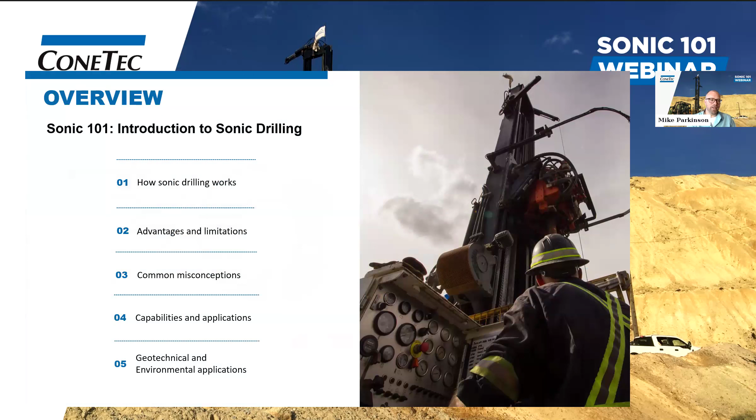Okay, so welcome to Sonic 101, an introduction to sonic drilling. We'll talk a little bit about how sonic works, the advantages and limitations, common misconceptions, and then we'll talk more about capability and geotechnical and environmental applications.

Starting a little bit with our own history, ConeTec was founded back in 1985, and the first CPT we ever pushed was actually deployed from a Mud Bay Drilling rig here in Western Canada. Mud Bay Drilling has been providing drilling services since 1972, so for over 50 years. And we added sonic drilling services back in 2002, so over 20 years ago. We did that in collaboration with ProSonic, and ProSonic was later acquired by Boart Longyear.

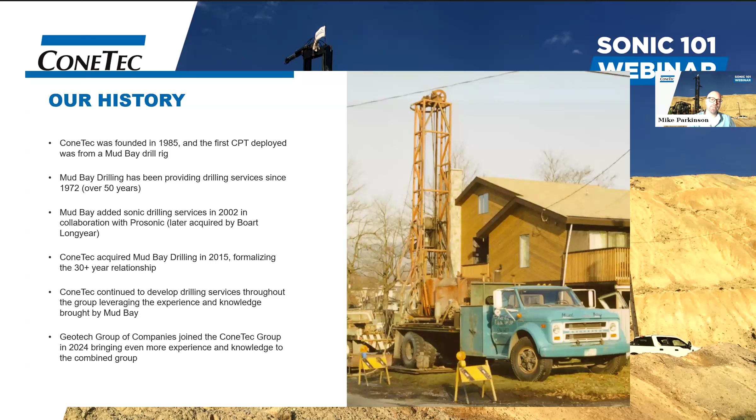So ConeTec acquired Mud Bay Drilling back in 2015, and that was really just formalizing our 30-year relationship at that point in time. Since then, we've continued to develop drilling services throughout the ConeTec offices and around the world, and we've been leveraging the experience and knowledge brought by Mud Bay's 50 years of experience. And then more recently, we added the Geotech group of companies to the ConeTec group at the beginning of this year, actually. And that brought even more experience and knowledge to the combined group.

We got another poll here as well. This one's just, what's your experience with Sonic? And I think Kelly will put that up. Yes. Let me get rid of this one. We'll just give that a second. Maybe while that's happening, I'll start with some Sonic basics here.

So the basics of how sonic drilling works is that it uses high frequency vibrations to advance the drill string and the bit. The vibrations are produced by two counter-rotating weights in the head, or eccentric weights, which is essentially the oscillator. These weights are timed to each other, so the lateral forces are equal and opposite, and they cancel each other out, and the vertical forces are equal and in the same direction. So it only transmits forces vertically down the drill string.

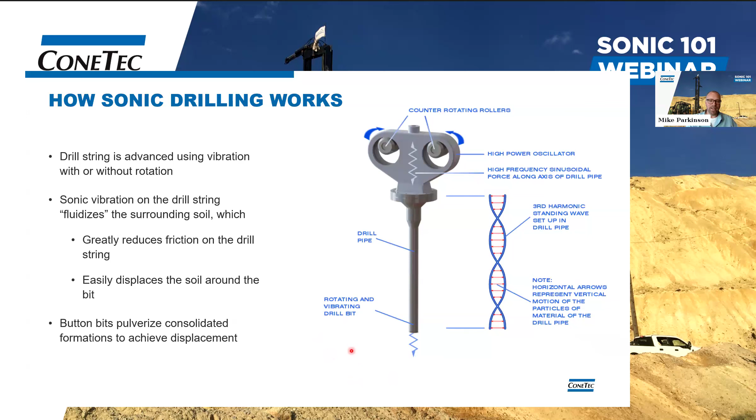And then the drill string is advanced using both vibration and rotation, sometimes without rotation though. The sonic vibration on the drill string fluidizes the surrounding soil, which greatly reduces skin friction on the drill string, the core barrel, and the casing, and then it easily displaces the soil around the bit. There's carbide buttons on the bits and shoes that can pulverize rock or consolidated formations so that you can achieve this displacement with the core barrel or casing.

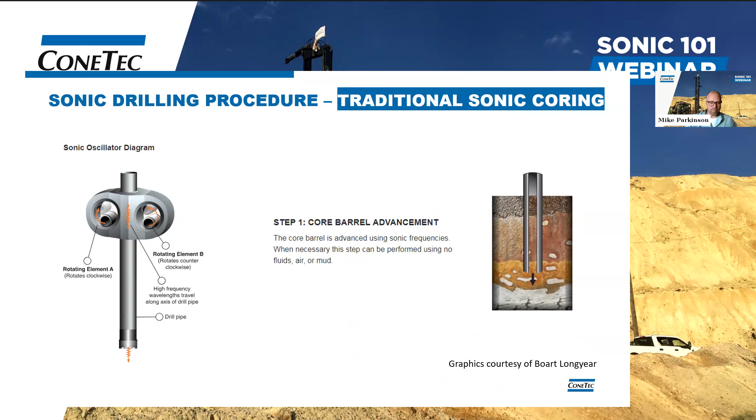So the traditional sonic coring in North America would be 4x6 coring, or that's what we call it. That's a 4-inch core with a 6-inch casing. And that's what I'll refer to as traditional sonic coring from now on. So the first step is that the barrel is advanced into the formation using both rotation and vibration. You're not using any fluids or water at this time. Once you've advanced the barrel, you can stop and disconnect from that. And the core or the sample is inside the barrel at this time.

The next step would be to connect to your casing or your override casing, and you'll actually override that casing over top of the core barrel, which is already in the formation, again, using vibration and rotation. And at this time, you'd use some water or flushing media to keep the annulus clear between the casing and the core barrel, but the core itself is protected inside the core barrel and not subjected to whatever flushing media you're using. Once you've met the same depth as the core barrel with the casing, then you'll disconnect from the casing, reconnect to the core barrel, and pull the core to surface and extrude it.

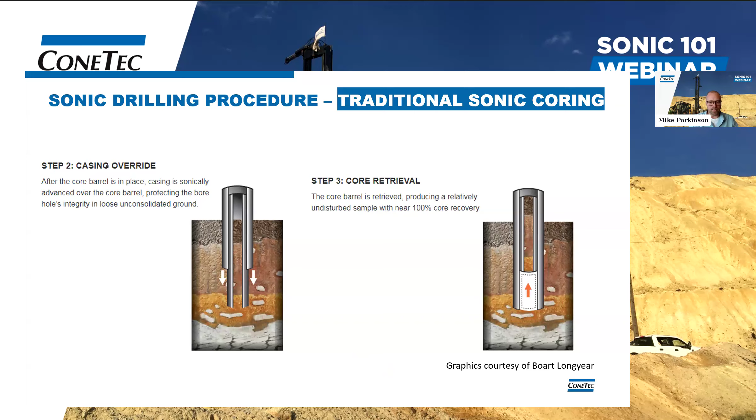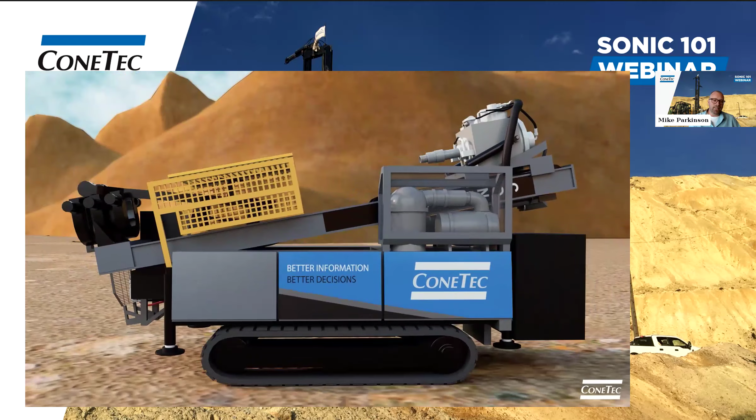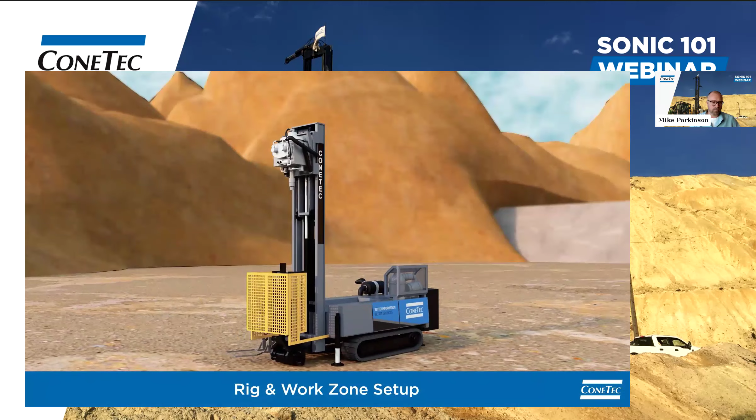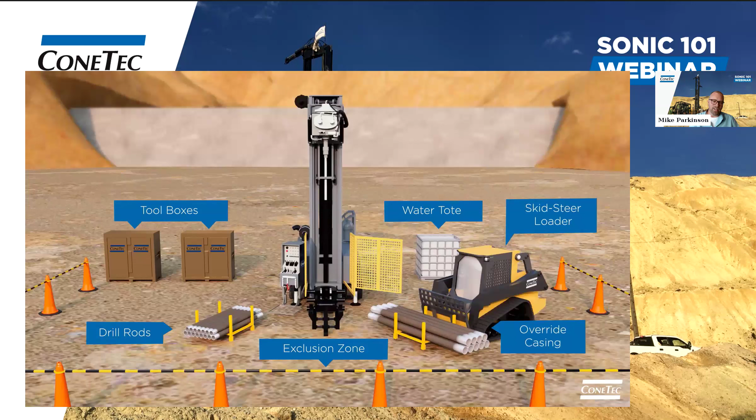We have a nice animation here that'll run. So this animation depicts one of our compact sonic drills, so smaller, shorter stroke drill rig, but still 150 hertz and 50K. The yellow door there is the rotation guard, and then that's the casing presenter or rod presenter. Usually have casing racks and rod racks on site and some kind of support equipment like a skid steer or small loader.

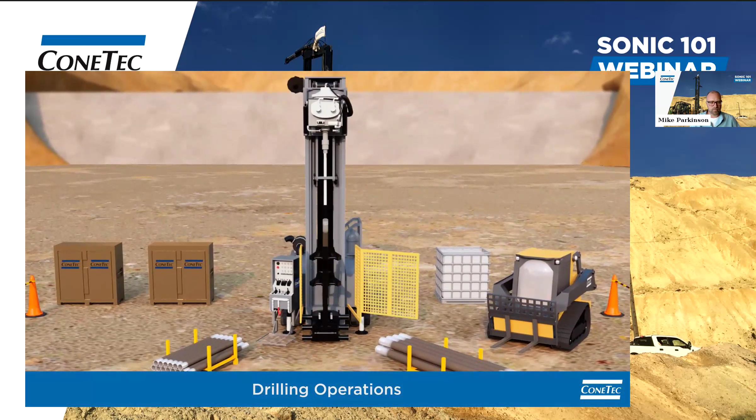So then this is the core barrel being advanced into the formation, again, rotating and vibrating. You can see the core goes inside the barrel. And then the casing's overridden over top of that. And the barrel's retracted back to surface and the sample extruded.

Right. Did we get the results of that poll, Kelly? People's experience with Sonic? Yep, I did. I posted it for a little bit. Let's see if I can share results. Yeah, so the experience is about 50-50 as to completely new to Sonic or a little experience. There's just a few frequent specialists on here. Great. Okay. Great to know. Thank you.

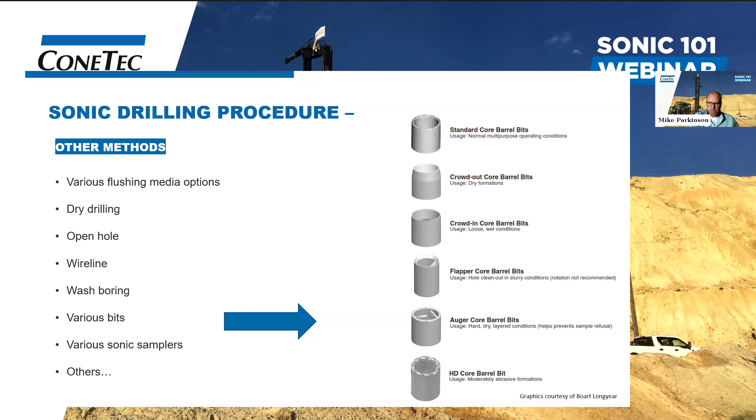And then there's a ton of different bits that you can use to help maximize sample recovery or just increase production rates. And then there's various sonic samplers. One that we're pretty familiar with is an Aqualock sampler from Eijkelkamp. It doesn't actually require any casing, and it's very, very good at collecting sample in very soft soils. And there's just a lot of other options as well beyond the traditional sonic coring.

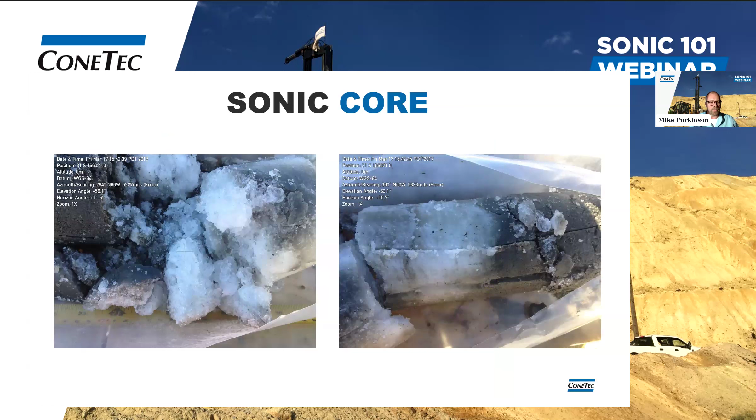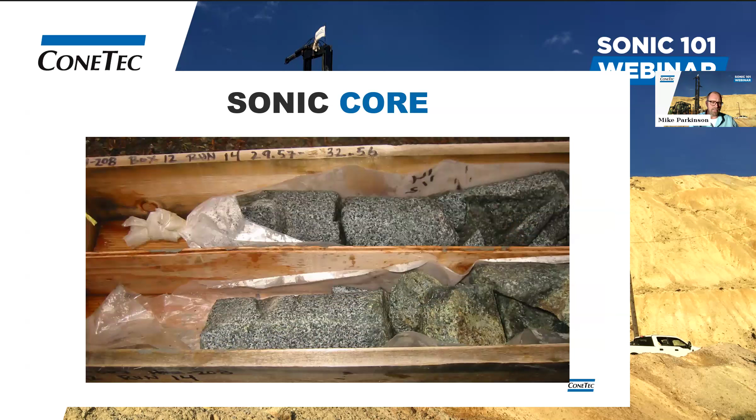And then this is actually a really interesting example. This was a mini sonic rig installing some wells. They encountered a granite boulder pretty close to surface, actually. Managed to drill through it and install the well. And when they were pulling the casing back out, the boulder actually got caught on the casing shoe and came out of the hole. So you can actually see the well installed in that hole below there. And then it gave us the opportunity to take this very cool picture of the granite boulder with the casing shoe, the core barrel bit, and the core that they took out of that granite boulder.

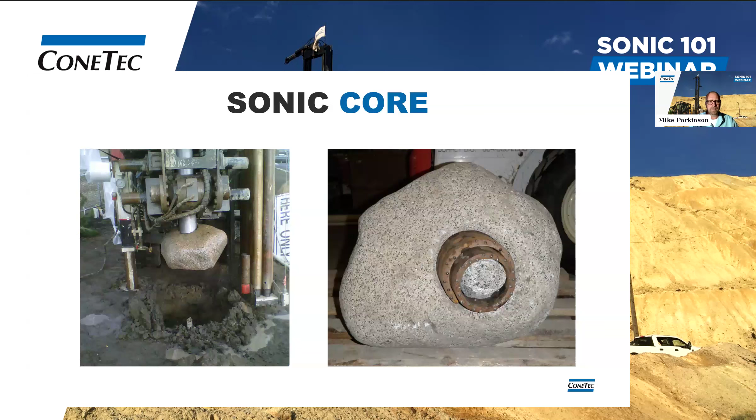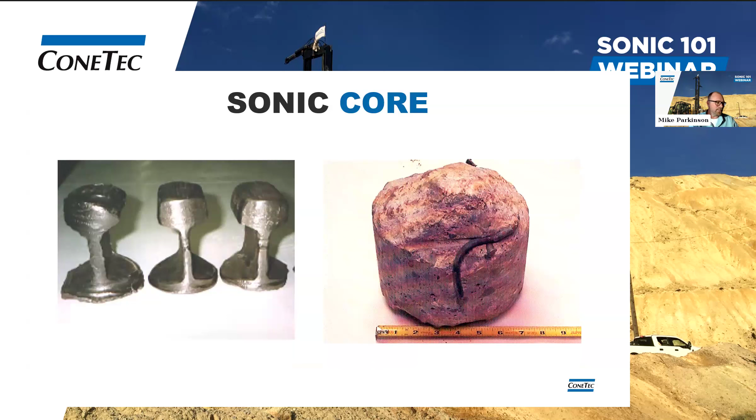This is just showing that we can and have drilled through steel. Those are chunks of railroad, I think mostly for demonstration purposes. And then that's an 8-inch diameter core of a steel reinforced concrete, which is, again, no problem to drill with sonic.

So speaking to the advantages of sonic drilling, the typical claims, especially that you'll hear from manufacturers in particular, is that it's three to 5 times faster than conventional methods. It produces up to 80% less waste than conventional methods. It's straight and accurate, often with less than 1% deviation. You can collect high quality core in all unconsolidated formations. It produces a fully cased hole. And the big thing is that it gives you this versatility and confidence in your site investigations, because you know that you can drill through any formation and collect samples.

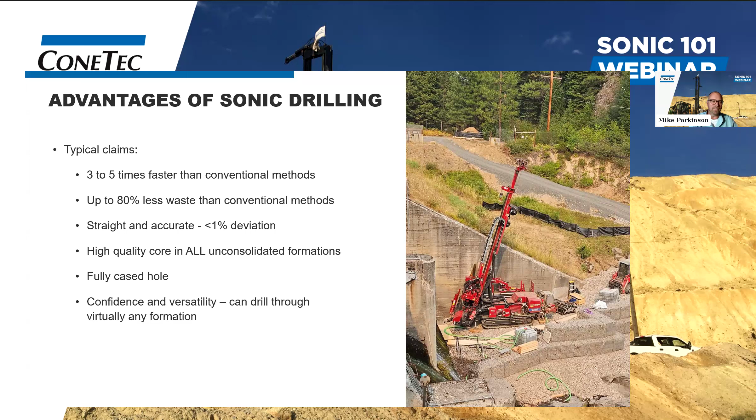So in my opinion, there's the 2 real primary advantages, and that is that quality, versatility, and confidence. So you know that you can drill, sample, case, and collect core in all these formations. So flowing sands, gravels, conglomerate, till, and so on. If it's a difficult site or difficult conditions and you need sample for sure, then sonic drilling is going to be able to provide top quality core samples in nearly any formation, and also to significant depths.

You should consider that if you don't need sample, there may be a more efficient way to do it. Or if it isn't difficult or an unknown formation, then there may be more cost-effective ways to do it as well. But if you know it's difficult, or you don't know what it will be, and you need good sample, or you need sample from deep depths, or you really need a cased hole, then that's a major advantage of sonic drilling.

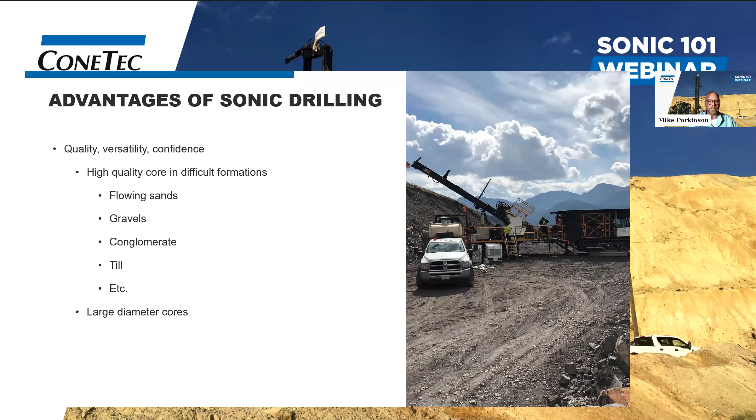The other huge advantage, in my opinion anyways, is this ability to handle, advance, and use casing to extreme depths. So it's easy to advance casing. It's easy to adjust your casing. You have this ability to clear and flush your casing at any time, and adding the vibration to that makes it a lot easier to work with.

The ability to override and telescope your casing as required. So if you needed to telescope a hole, you don't need to start with a large diameter. You can drill until things get too difficult, and then you can override one size larger to free everything up, and then continue on extending your borehole.

They have common casing sizes from 4-inch all the way up to 12-inch. And it just produces this clear, fully cased hole for very high quality installations. And having the vibration option nearly eliminates any concerns about bridging, slough, or sand locking.

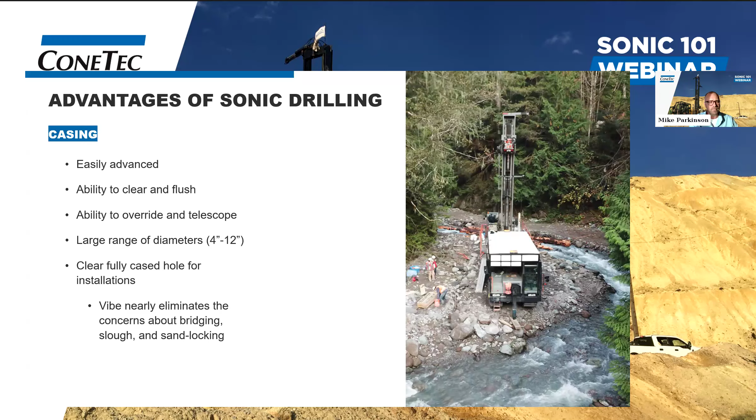These are some good diagrams from, actually, I think back in our ProSonic days, again, talking about the casing methods with sonic. So it's very, very good for well installations and provides high quality well installations. So you're drilling and sampling, collecting a continuous core. You can see what the formation is that you're in, and you're advancing casing the entire way.

You're only using clean water, so there's no muds or polymers or anything like that in contact with the borehole. And you have this really good contact between the casing and the borehole wall. Then you can install your monitoring wells or other types of wells inside of there. And as you pull back the casing, you end up with very good contact between the filter sand and the borehole wall, as well as your seal and your grout in the borehole wall.

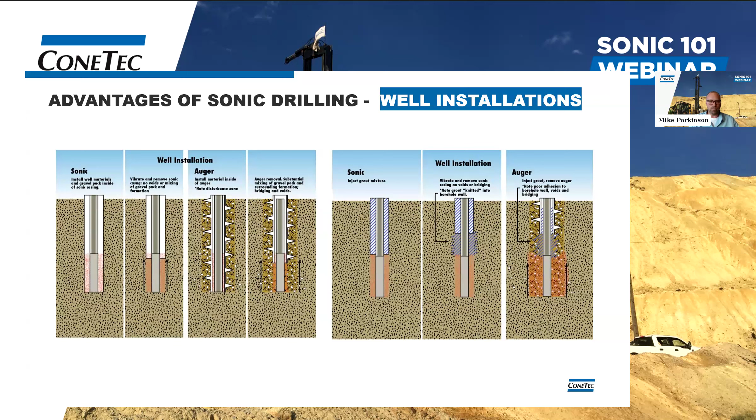In these diagrams, they compare it to auger, and you're drilling an oversized hole with an auger. The cased portion is much smaller than the hole diameter. And then as you pull the auger back, your sand and your grout is mixing with slough and cuttings as you're exposing the screen. So you just don't get the same quality of well installs. And then you also run the risk of bridging and sand locking.

I talked a little bit about the multi-casing, and being able to override casing and the different diameters of casing. This is an interesting advantage, again, from back in our ProSonic days, being able to use this multi-casing method to isolate contaminated zones. So if you're drilling to install monitoring wells for an environmental program and you have a contaminated zone overlaying a confining layer, you can drill traditional 4x6 sonic into the confining layer, collect samples the whole time,

know what formation you're in, and then once you hit that confining layer, you can override a 7-inch casing or a larger diameter casing and set that into the confining layer, which essentially isolates your contaminated zone from the drill string, and then advance your drill string on and don't have to worry about dragging contaminants downwards. The photo on the right is just a very cool photo that we'll talk about later of all the different casing sizes telescoped on a deep hole that we completed.

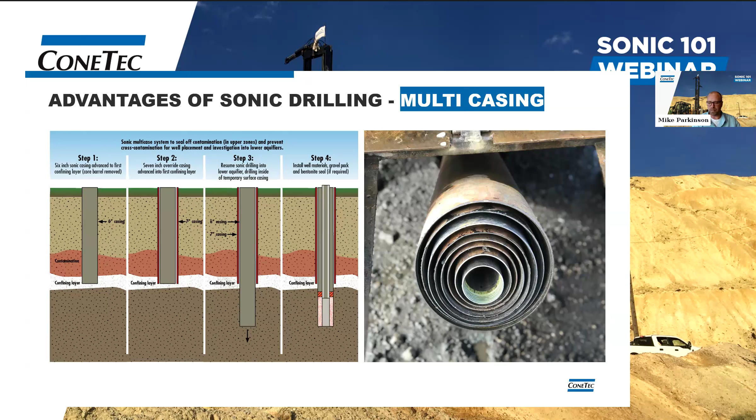Another advantage is that it's very straight and accurate. It's partly because it uses vibration, like the vibration is doing the work, pulverizing the formation and displacing the formation. So you're not really pushing on the bit, which is often what causes your bit to deflect and your hole to deflect. The other thing is just because of the methodology where the casing is always chasing the core barrel and then the core barrel is always being guided by the casing.

And the cool picture on the right shows a 4-inch core barrel with a 6-inch casing, 7-inch casing shoe, and 8-inch casing shoe. So you can see how tight the annulus is between all the different sizes of tooling.

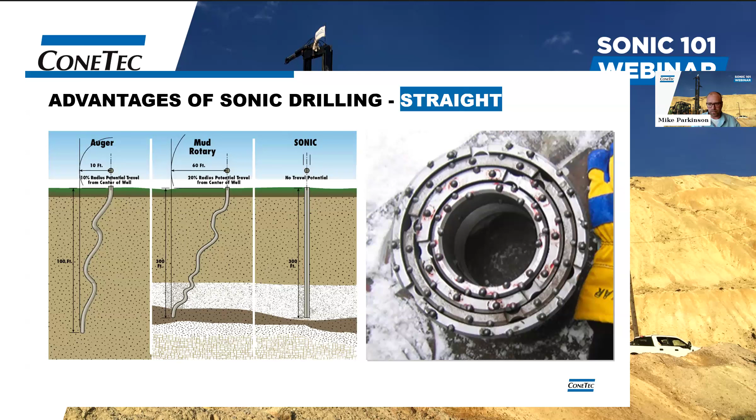So I do have a couple example projects, and I think that segues well into this one. This first one is a mining project in Canada. And what they needed to do was install instrumentation at the toe of this waste rock facility, but we couldn't access the toe of the facility for environmental reasons. It was an environmentally sensitive area, so you couldn't bring a drill rig into there.

So the solution was to set up on one of the benches and drill at an angle through the waste rock, through the overburden material and into the bedrock at the toe of the dam so we could install this instrumentation.

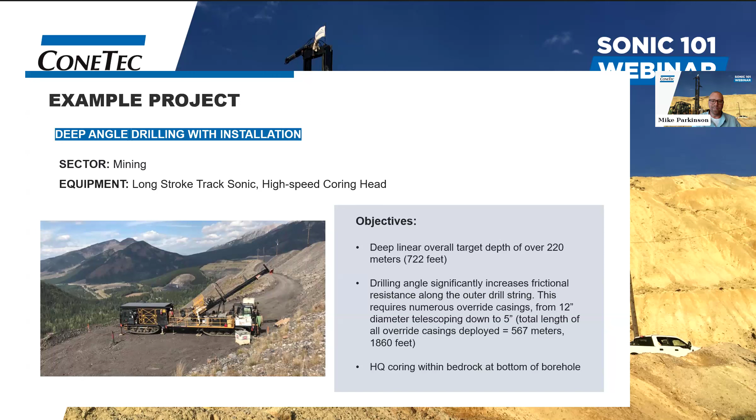In the end, it was about 700 linear feet of angle drilling on a 30-degree angle through the waste rock, and then a small amount of overburden and then rock. So we had to override casing quite a few times because that kind of pressure on the casing, especially drilling on a 30-degree angle, got pretty high.

So in the end, they deployed a total of 570 meters or 1,860 feet of casing installed. And they managed to slot the 4.75-inch casing into bedrock, install HQ, diamond drill the bedrock formation, and then install triple nested vibrating wire piezometers. They also logged the hole for inclination, and they found out there was less than 1 degree of measured deviation along the entire length of the borehole.

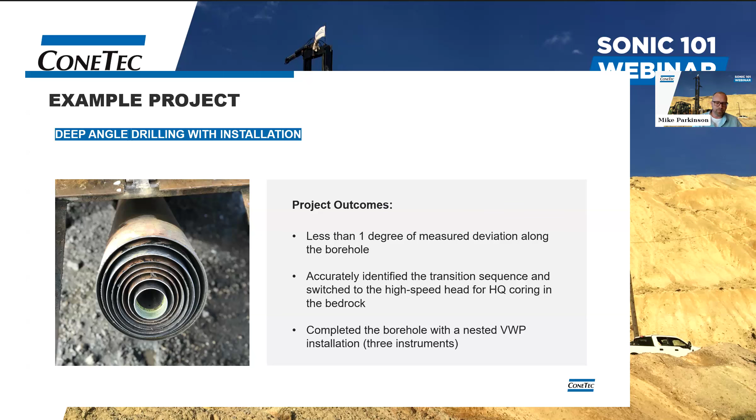Another advantage is speed. The typical claim is that it's three to 5 times faster. I'd say it depends on what you're comparing that to. It's not going to be any faster than augers if you just need grab samples to 20 feet in auger material. And it's not going to be any faster than, say, wireline coring if you're in material that you can core at depths of 500 feet or so. And that's simply because it isn't wireline.

But where it is very fast compared to other drilling methods is when it's difficult conditions and you need samples and you need a cased hole. So 100-foot holes in heaving sands or coarse gravels, where sampling is required and instrumentation required at the end, it's going to be very, very fast and considerably faster than other methods.

You do also need to consider what sonic rig you're using. There's different sizes. There's different rated power of the rig. There's different rated power of the heads, there's different stroke, and there's different methods for rod handling. So the photo on the right, for example, is one of our long stroke drills. That's actually me on a project in Arizona.

And that rig handles 20-foot rods vertically. And I think that's about 12 rods in the rack, which is 240 feet. It only takes about 6 minutes to trip that 240 feet in on this rig. But if you're on a rig that used 5-foot tooling and you had to lay it out, it might take well over half an hour to trip those rods. So that does have a very big impact on the production rates with sonic drilling, because the core barrel is tripped in and out on the rods for every single run.

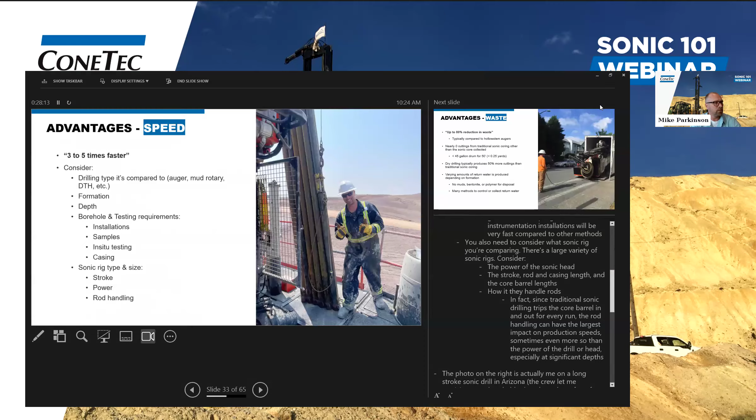Uh-oh. Did I lose you guys there, Kelly, or am I still? No, you're good. You switched to the presenter view for a second, but now it's back. Okay. Yeah. Cool. Good. Okay. Sorry, carrying on here. Yeah, my slides are not advancing anymore, are they? Try that. There we go.

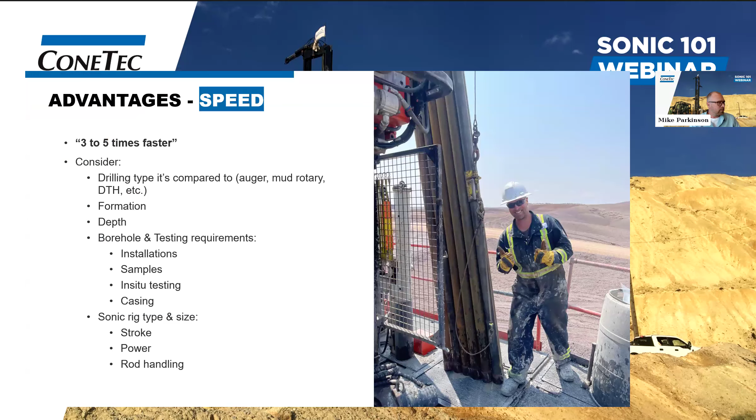Okay, another advantage is there's up to a 90% reduction in waste. That's at least what the typical claims are. I believe that they're comparing that to hollow stem augers. It's true that there's nearly zero cuttings produced from traditional sonic coring, other than the core that's collected itself. And that core, if you were disposing of it, is usually less than a 45-gallon drum for 50 feet of drilling. Dry drilling does produce about 50% more cuttings or more cuttings in some way or form.

But then another thing to consider is that there's varying amounts of wastewater being produced, depending on the formation. But there's no muds, bentonites, or polymers with traditional sonic coring that you need to dispose of. And there's many methods to control and collect that return water.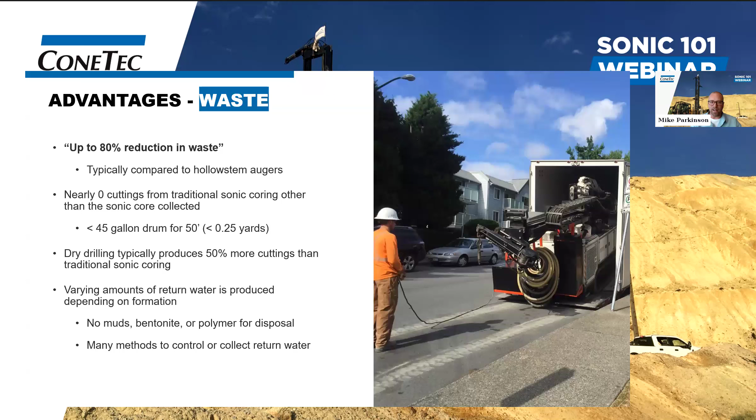Then you advance your casing, and the cuttings and slough that it produces falls down into the hole that you drilled where you collected the sample with the core barrel. So you only advance the casing 5 feet, and you leave the bottom 5 feet open to collect the cuttings and slough.

Then you send your 10-foot core barrel back down again, and the first 0 to 5 feet is going to be the cuttings and slough that you've produced advancing your casing, and then you're going to advance 5 feet into new material and collect 5 feet of new core. Extract the core barrel again, and then you just advance the casing 5 feet again. Then you repeat this over and over again to depth. So essentially, you're using a 10-foot core barrel to collect 5-foot cores each time.

This method does require the hole to stay open, or open enough for the cuttings to fall down into this hole when you advance the casing. The other option would be that you drill a 10-foot core barrel in and extract it, and then you advance your casing 10 feet, and the cuttings and slough end up inside the casing. Then you can send your core barrel back in, clean out the cuttings and slough, trip your core barrel back out, discard the cuttings and slough, trip your core barrel back in, and take your 10-foot core, and then repeat

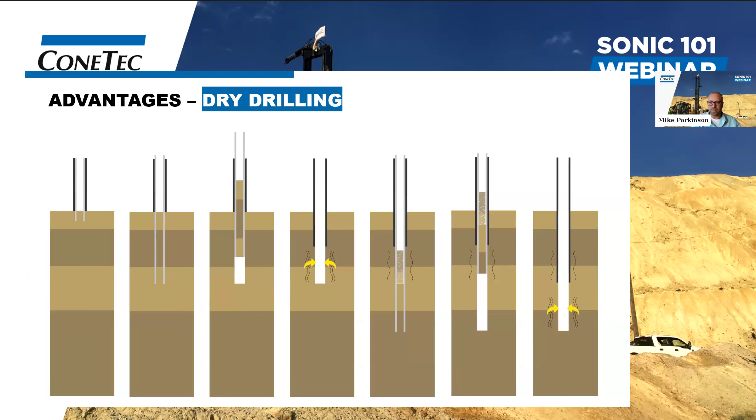this over again. So in that method, you're collecting 10-foot cores, but you're running 2 trips for every core. In the first method, you're using 10-foot tooling to collect 5-foot cores. But the first method can be quite efficient if you have a long stroke machine that can use a 20-foot core barrel, because then you can still advance the borehole 10 feet at a time with each run.

There are some considerations when you're thinking about using sonic drilling. I think water requirements are one of the big ones. Traditional sonic coring or 4x6 sonic coring uses water to cool the bit and to clear the cuttings from the annulus when you're advancing casing. There's dry drilling methods, but they do have lower production rates, and they do produce more cuttings.

The water consumption does vary greatly by formation. So coarse materials typically take the water as you're pumping it. You don't get any return. And fine materials typically return the water back to surface. So if you're drilling through coarse or dense gravels, for example, it's slower, tough drilling, and you're just pumping water the whole time. You need a good water supply. Similarly, in stiff, fine materials, it could still be slower drilling and you're pumping water the whole time, but then all that water is returning to surface.

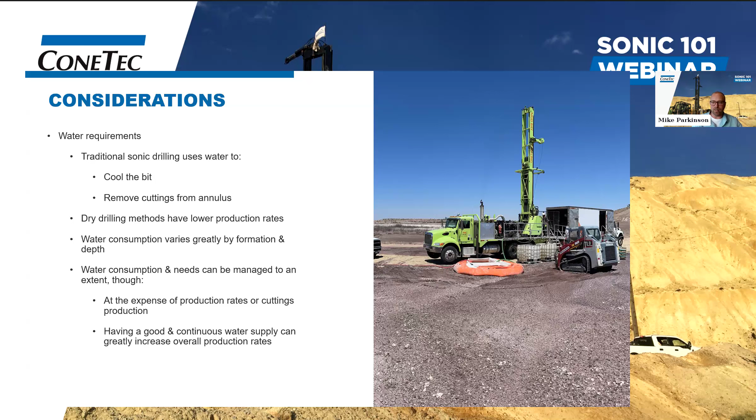But yeah, the water consumption and needs can be managed to some extent. So you can go to no water requirements, but you sacrifice production rates for that. And in general, having a good continuous water supply can greatly increase your overall production rates with sonic drilling.

Another thing to consider is that traditional methods do include extending casing to full depth. So cohesive or sticky formations, they can be challenging, and then deploying override casing to be able to continue advancing the hole can be time consuming. So there are options to add polymers and muds to reduce friction, but then you lose that advantage of water only or dry drilling. So it can be inefficient if casing isn't required.

In the same thought, traditional sonic drilling includes collecting core samples for the continuous core for the borehole. If you don't need continuous core, then it can again be inefficient. There's options to drill without collecting core with one of those full face bits or just by advancing casing. But again, the traditional sonic drilling we're talking about includes collecting core the whole way. And if you don't need that, it can add time.

There's no reliable wireline sonic options available on the market, at least in our experience, and we've tried quite a few, and we own a couple of wireline sonic options, and mostly they just don't work in all formations, particularly sands and gravels.

So the core barrel does have to be tripped in and out of the hole on the rods for every single run. So that, coupled with the need to advance casing and then override casing as you get deeper, can result in exponential decay in production rates with depth. So you can drill and sample very deep with sonic, but because you're collecting core and advancing casing the whole time, the speed and overall production rates do decay as it gets deeper.

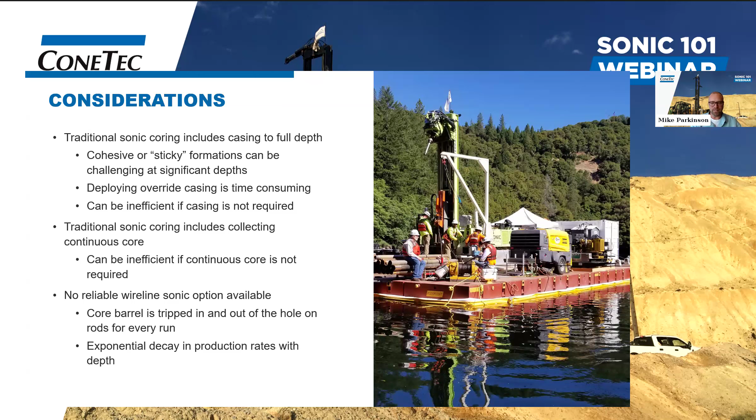Some of the most common misconceptions that we hear anyways is that sonic drilling is only for environmental drilling, or sonic can't be used for geotechnical testing or sampling. The samples are disturbed. Sonic is expensive. Sonic is ultra specialized. Or one that we really do hear a lot is that sonic didn't work, or it doesn't work, or we already tried it.

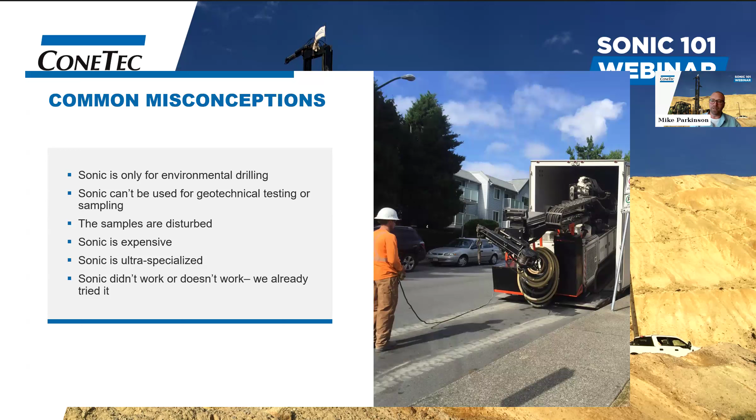So addressing some of these, the first one being that it's only used for environmental drilling. I do believe that it's widely considered as primarily for environmental drilling in North America. In fact, the ASTM for sonic drilling talks about it being a geoenvironmental drilling method, but it is used all over the world for all kinds of applications, from environmental to geotechnical to geothermal, exploration, and more.

In our own experience, we know it's very common to do geotechnical tests such as SPTs and LPTs. SPTs are also noted in the sonic drilling ASTM. We've collected thin-walled tubes, we've deployed CPT, done vane shear testing, DCPT, as well as borehole geophysics inside the steel casing.

So continuing with these misconceptions, there's this misconception that sonic just can't be used for geotechnical work, and that's because the samples are disturbed. So to begin, disturbance and sonic disturbance in general is a big topic, and I'm not an expert by any means, but there are a couple things I'd ask you to think about or consider.

It is common practice all over the world, some places more than others, and in the subregions more than others. But it is common practice to collect SPTs and LPTs and even Shelby tubes from traditionally drilled sonic boreholes. Within our group, we deploy CPT and vane shear in sonic boreholes all the time.

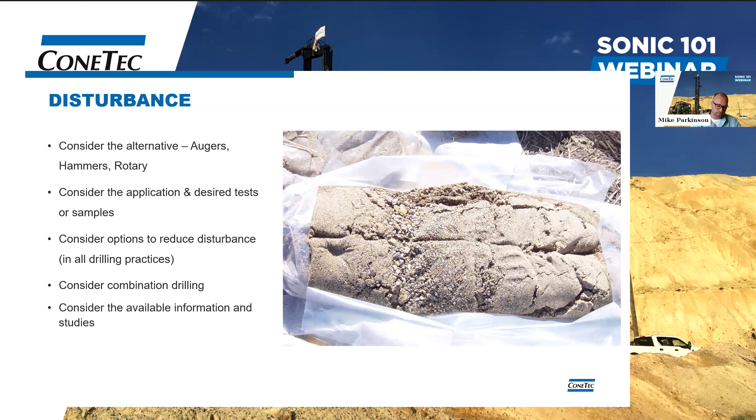There's options to combine sonic drilling with other methods, including mud rotary, and I'll talk about that a little bit later in the presentation. And then finally, there are studies out there. We've been part of some studies and papers that were published with UBC and UC Davis addressing the effects of sonic drilling and disturbance on CPT data. I have a bit of info on that here.

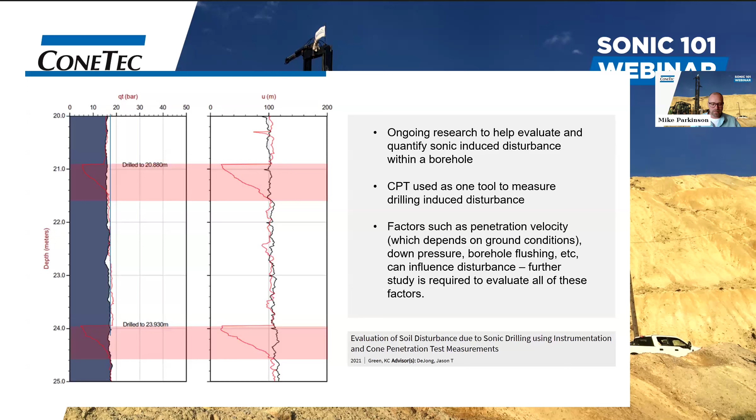Okay, and then the sonic is expensive argument. True, sonic drill rigs are expensive in relationship to other rigs of their size. They're expensive to maintain. The tooling is expensive. So therefore, the operating rates can seem expensive. But I would consider, as discussed, the sonic drilling is fast. So consider your cost per linear foot of your total investigation, installation, or exploration.

Think about the total time on site and the external impacts that might have, permits and other contractors on site, the oversite or adjacent operating costs. Think about the waste disposal, think about the containment, and then, of course, the intangible costs, right? What would it cost to go out and do the job twice because you couldn't get it done the first time? If you don't know the site or you're expecting challenging conditions, sending a sonic rig the first time and getting everything you need, including high quality core, can make it a lot more cost effective.

Is there a rule of thumb on a percentage more that it tends to cost per day compared to rotary drilling or auger drilling? Yeah, not in my experience. It really varies. Yeah, just because it varies by region so much. Yeah, I couldn't even give you a general ballpark rule of thumb. I would fully agree that it's more expensive in a cost per day or cost per shift, but I think you can get meter rates very similar to rotary drilling, and even auger drilling.

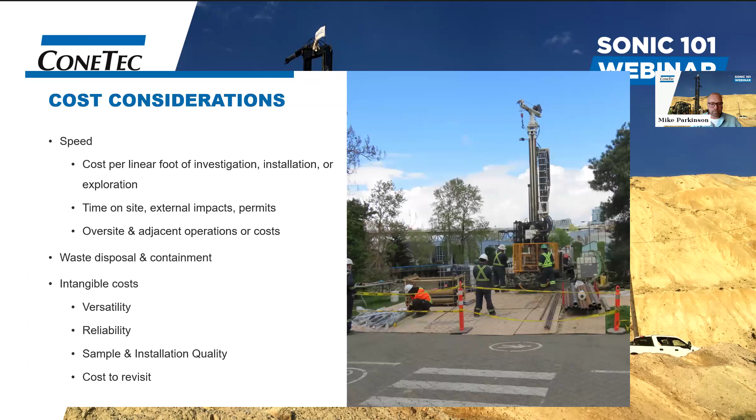And then the sonic didn't work, or sonic doesn't work, or we already tried it argument. I think it's very important to understand that sonic is not sonic is not sonic. They're not all the same. And it's not ultra specialized either. It's not that only a few contractors do it. The idea is probably more prevalent in some regions than others.

I know sonic is super common in Western Canada, but I know there's parts of the US and other parts of Canada where it's not as common, and it seems like it's this very specialized thing, but it really isn't. I think a lot of sonic contractors actually treat it more specialized than it is, and I can say that because I am a sonic drilling contractor. But the fact is that sonic's been around. The sonic that we know today has been around for decades. Modern sonic drills that we use today have been operating for over 30 years, and the basic rigs and principles haven't really changed.

There's numerous small manufacturers building sonic drills using common heads. There's about 10 common sonic drill heads in North America, ranging from 25K to 50K, and then 60 to 150 hertz. And I'll talk a bit more about what the 25K, 50K, and the hertz means. And then there's also other types of resonant heads available that would be considered sonic as well. So there's this big range of equipment, and not all rigs are equal, right? Some of them might be small and nimble and might have limited capabilities, and others would be very large and you might not be able to use them on your site, but they might have very extensive capabilities. So it's not all the same thing.

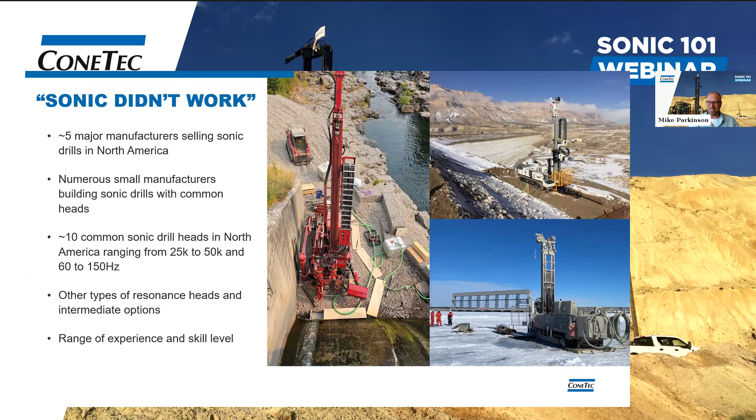And then there's, of course, the range of experience and skill level with contractors. There can be contractors that have been doing it forever, but have only been using mini sonic rigs for this particular type of thing. Anyways, I just urge you to not consider all sonic rigs to be the same and all contractors to be the same.

Building on that a little bit more, I wanted to talk a little bit about the details with sonic heads in particular. So the heads are typically rated on the force produced by the oscillator. So when you hear people talk about a 50K head, they're talking about a head that produces 50,000 pounds of oscillating force. So a 50K head that works at 150 hertz, or rated for 150 hertz, only actually reaches that 50,000 pounds of oscillating force at 150 hertz,

because the oscillating force is directly related to that angular velocity of the oscillator or the weights. So it's proportional to the square of the frequency actually. So a 150 hertz 50K head operated at 75 hertz only produces 12,500 pounds of oscillating force. What's more important than the oscillating force, though, is resonance.

And resonance occurs when the sonic head frequency matches the natural frequency of the drill string in the formation, or one of the overtones of that natural frequency. So an overtone is any whole multiple of the natural frequency. So if the natural frequency is 50 hertz, then an overtone would be 100 hertz. The next one would be 150 hertz, 200 hertz, and so on.

So the energy that's transmitted through the drill string from the head and to the bit is at its absolute highest when you're in resonance. And then on top of that, the skin friction on the casing or core barrel, both the inside of the core barrel and outside of the core barrel, is the lowest when resonance is achieved.

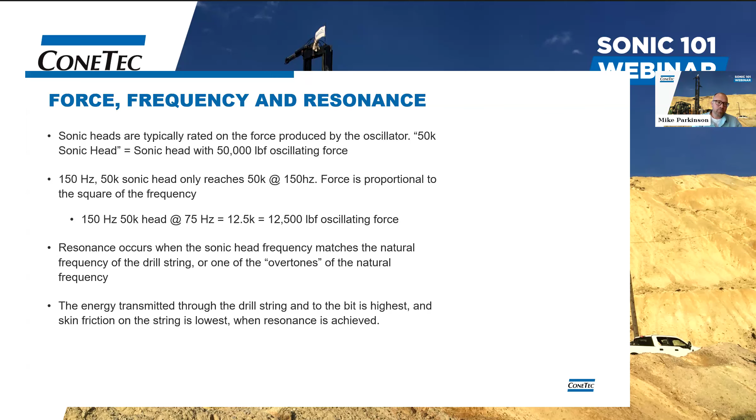So the natural frequency changes depending on the conditions and the confining conditions and the length of the drill string. The confining conditions side of it is ultra complex, and I'm not the person to explain it, but there's an important point about that, and that's the length of the drill string.

So an idealized formula for the natural frequency of an unconstrained steel pipe, so a drill string we'll call it, would be C, which is a constant, a speed of deformation, that's about 16,500 feet per second in a steel pipe, over 2 times the length of the pipe. So if we ignore the fact that there's external conditions, the natural frequency of a 100-foot steel pipe is 82.5 hertz, which means that the first overtone is 165 hertz.

So with a 150 hertz, 50K sonic head, you wouldn't reach the first overtone. So to work in resonance, you'd be working with 82.5 hertz, which is only just over 15,000 pounds of oscillating force, not the 50,000 pounds that you could get out of the head. A 50-foot steel pipe would actually be 165 hertz, and a 400-foot steel pipe would be 20 hertz, and then overtones at 40, 60, 80, and so on.

So of course, this isn't the case in practice. The natural frequencies are typically a lot lower than that, based on the external forces as well. But the idea here is that the longer the drill string, the more overtones you have to work within, and the more resolution you get to get the most out of your sonic heads.

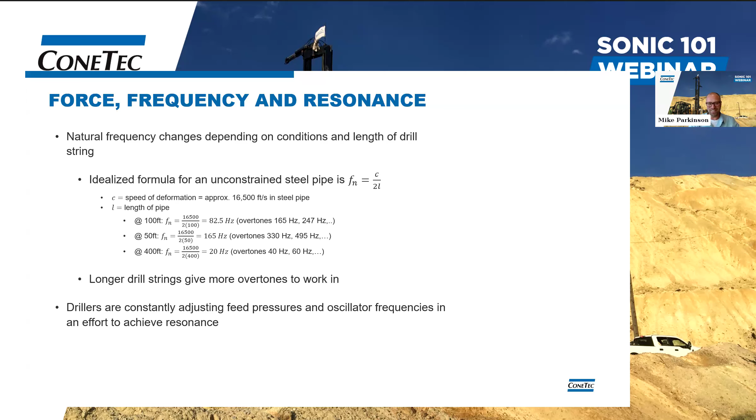I do know that Dr. Peter Lucon wrote a dissertation called Resonance, the Science Behind the Art of Sonic Drilling, which is also a great title. And that talks a lot more about it if you're interested, because I'm not the one to explain it any further than that.

Okay, talking about additional capabilities and applications. I touched on the diamond drilling or dual drill heads already, but

I think Mike might be frozen for a second there. Oh, he's back. Sorry, Mike, you just froze. Yeah, we got you now.

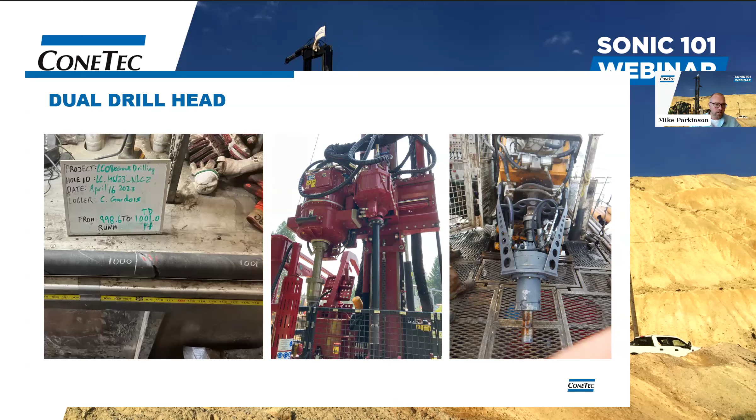Okay, we also touched on combination drilling, and so we have the options to combine sonic with diamond drilling, but we also have the options to combine sonic with mud rotary drilling, where you can use sonic to drill the more difficult or coarse materials and challenging materials. And then once you get into finer or more sensitive material, you can switch over to mud rotary and do more conventional mud rotary drilling and geotechnical sampling.

A good example would be if you're working on a dam, for example, and it's got a riprap shell, you can drill through that with sonic and case into a softer kind of core material, and then switch over to mud rotary drilling and collect really high quality in situ samples and tests.

We also have the option to deploy CPT. There's some sonic rig manufacturers that give you that option right from the factory as well. This photo is one of our custom built 20-ton CPT ram sets. Fun fact, actually, the first time we did this was for a bridge back in 2007. So nearly 15 years ago. Yeah, nearly 15 years ago.

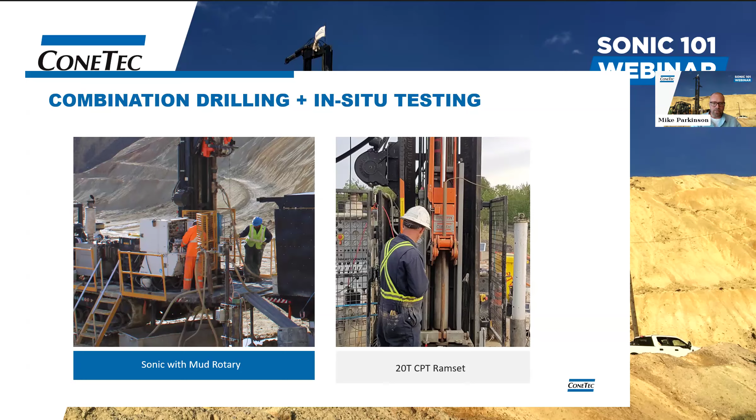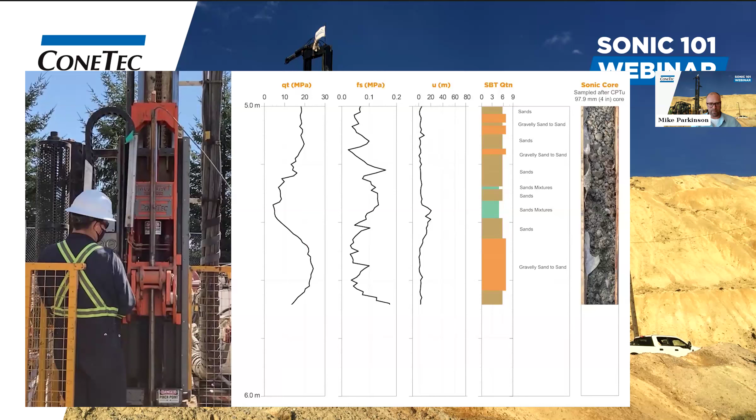Very cool graphic here showing this kind of mixing CPT with sonic. So on the left is kind of what's happening right now. You're getting a standard CPT plot there with tip resistance, friction, and pore pressure. And then we would sonic drill over top of that and get a full sonic core that matches the CPT. So you get the CPT data, and then you also get the visual data and the sample of it.

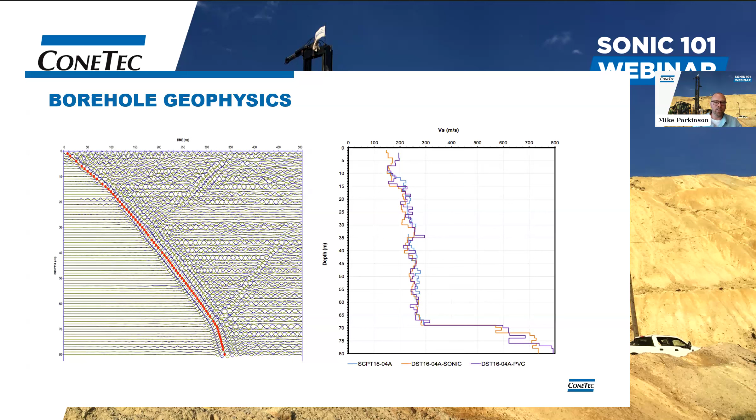You've drilled the hole anyways. You would normally install a casing, wait for grout to set, and then come back and complete downhole seismic. But because the sonic casing has such good coupling with the borehole wall, you can actually complete downhole seismic right inside the casing.

And that brings us to another example project. So this was a nearshore offshore project for port expansion. The big thing is that they were targeting significant depths, like more than 150 meters or 500 feet below mudline. And it was offshore, nearshore, in tidal waters. And they really wanted to optimize the information they collected in this thick and variable overburden. And it was overlying dense till. That's what they were expecting it to be overlying anyways.

So being on a floating platform, the solution was to use a sonic drill that was set up for combination drilling. So sonic plus mud rotary, plus CPT, plus vane shear testing, and seismic. So in the end, they ended up deploying CPT from the sonic drill with the portable ram set. When they hit refusal, they could drill out with the sonic, and then the hole was cased and they'd send the CPT back down again. And I believe they ended up reaching depths of over 160 meters and collected seismic data to those depths.

Then they could move over to an adjacent hole and use the CPT data to target testing zones. And then they'd use the sonic to drill quite rapidly to those testing zones and set casing. And then they could switch over to mud rotary drilling and collect, I believe they did Shelby tubes and electric vane shear tests. So high resolution electric vane shear tests as well. And again, it was all done from a single floating platform in tidal waters.

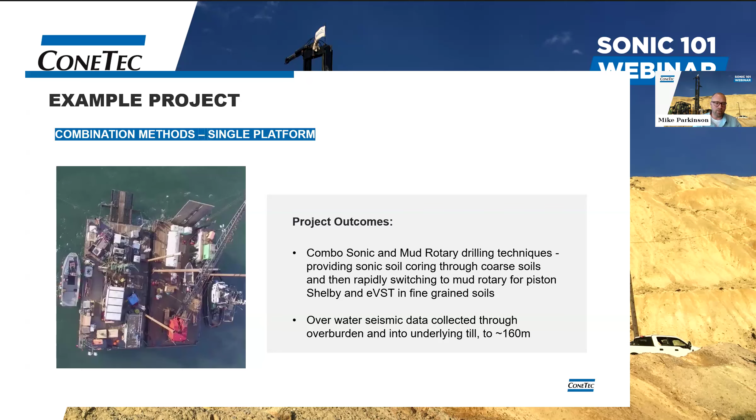There's a lot of interesting applications for fully cased angled boreholes in overburden. This left photo is a site in Quebec, and a contractor was installing a cutoff wall for a dam. The cutoff wall had to be slotted into the bedrock, and the overburden was super dense and bouldery, and they kept mistaking it for weathered bedrock as well. And they were just generally having a hard time getting that bedrock profile. So they hired us to come out and drill these angled holes through the difficult overburden and 20 meters into bedrock to prove that it was indeed bedrock.

And then they used all of that data to draw a better bedrock profile anyways. The photo on the right was a mine site, and they were trying to assess the ore in an old tailings facility to potentially remine it. And the tailings were water capped at the time, and they couldn't reasonably get a barge down into this pit. So the solution was to install these benches around the outside edge of the pit and then drill angled holes into the ore below the water so they could test it and assess it for remining.

And then another application that we've done on the environmental side is installing vapor probes and monitoring wells underneath buildings where the conditions were probably too difficult for a small portable rig, or it was too invasive for the business that was operating. So you can set up the sonic drill or a mini sonic drill on the road outside the building, drill at an angle underneath it, and install monitoring wells and vapor probes and whatever other instruments you might need.

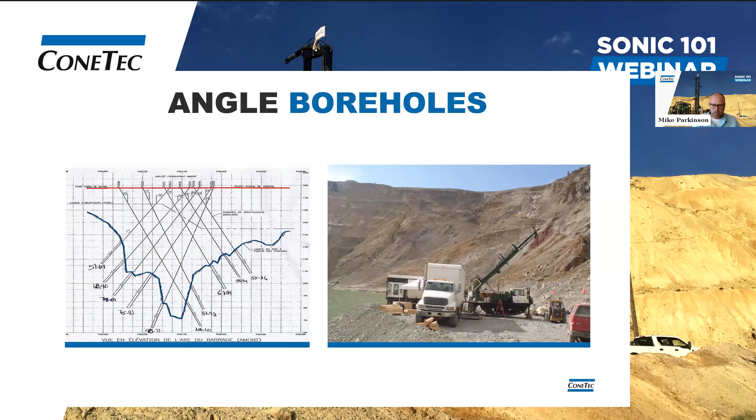An environmental or maybe hydrogeological application is this isoflow vertical aquifer profiling. So you can go out and sonic drill, collect continuous core and case as you go. And then if you find these zones of interest where you want to do a pumping test, you can drop this, it's kind of a packer and a screen, down into the casing, and you pull your casing back and expose that screen. And then there's a small pump that fits down in the rods, and you can collect pumping tests.

I think the application would be if you're doing vertical aquifer profiling, if you have a bunch of zones that you want to profile and you'd have to install a bunch of wells otherwise, you can do this all in a single borehole. And you're collecting sample the whole time, so you can identify those zones easily and just continue on advancing the borehole after the tests are done.

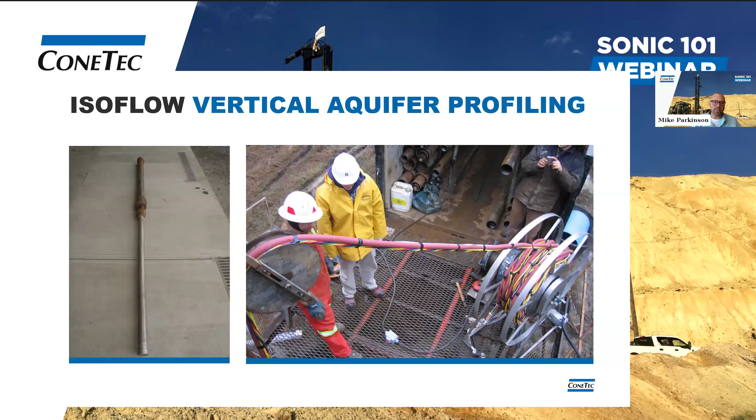Another water sampling option is these push-ahead discrete samplers. Again, regular traditional sonic drilling, collecting core, advancing casing. If you run into a zone where you want to collect water samples, you take the core barrel off and install the sampler. You deploy it on the rods, push it into the formation or vibrate it into the formation.

It's just a couple of reverse rotations to disconnect the tip, and then you pull the rods back and expose this laser slotted screen, and then you can sample the water with like a Waterra or a bailer or peristaltic pump or any of those kind of common water testing methods. Then of course you just pull the sampler out, put the core barrel back on, and continue advancing your borehole.

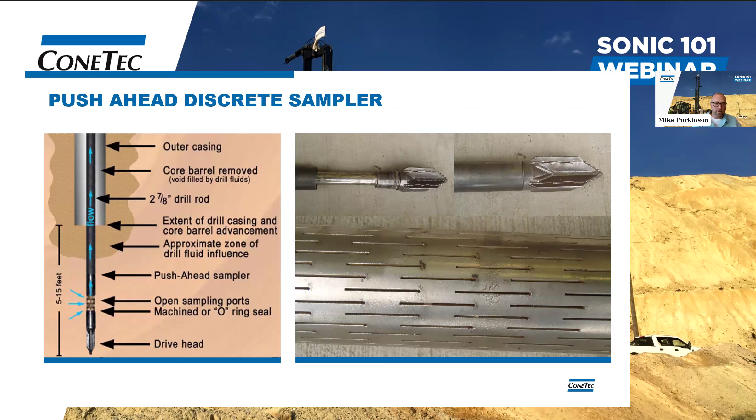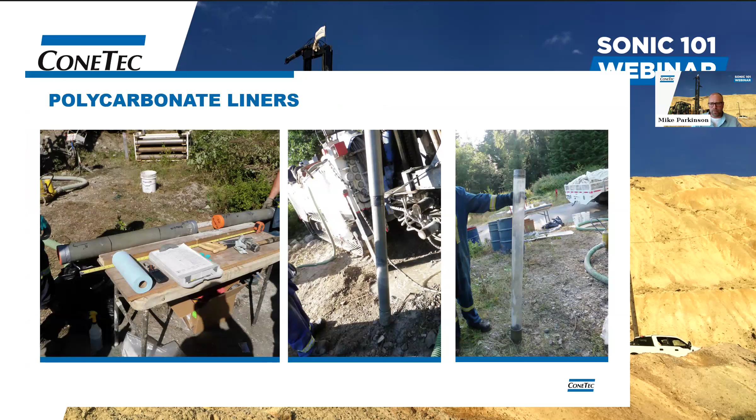There's options for polycarbonate liners that are actually housed inside the core barrel. So they're in there while you're drilling. The sample's collected directly into the polycarbonate liner. Then you just extrude the liner, put the caps on it, and tape it up. I think this is more of an enviro application anyways.

The crazy thing about it is they were getting daytime highs of -35. So they were seeing weather much colder than that, but when it's a daytime high of -35, that can be very challenging. Inside the enclosure, though, they were getting close to room temperature, high 60s in Fahrenheit or high teens in Celsius.

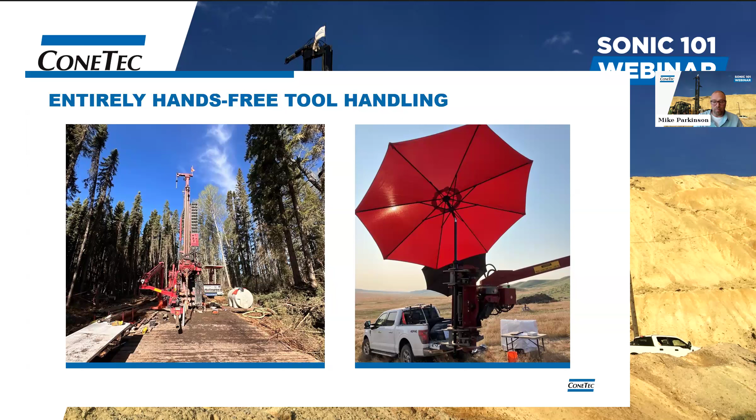There's entirely hands-free tool handling options. Most sonic drills have some kind of tool handling or rod presenter because they do use kind of larger casing and rods. But it goes all the way to completely hands-off tool handling. The rig in the photo is a Camp rig. This you can buy from the factory with a casing handler and rod loader, and nobody needs to pick up any steel. I should note you often sacrifice production rates as tool handling becomes more automated, but I think most agree it's a small price to pay for the decreased safety risk.

And we have these heli-portable sonic drills as well, and these are capable of everything that our other sonic drills are. It uses a Boart mini head, so it has the same capacities and capabilities as a Boart mini sonic. But then you can also do mud rotary and diamond drilling and SPTs and LPTs and CPT from this rig. Really anything you can do with the regular rigs, you can do with the heli-portable rig. It just takes longer. And I think I've got one cool video to show on that as well.

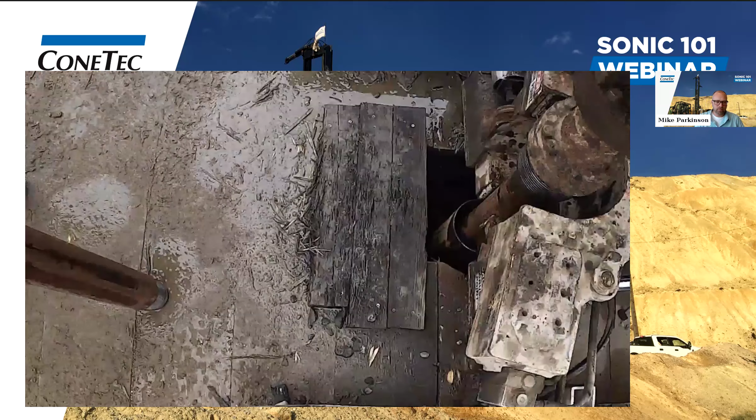All right. So just to summarize, Sonic is ultra versatile. It can be used for so much more than just environmental drilling. There's a wide variety of rigs and capabilities, and selecting the right rig and the right setup for your application is quite important. You know, Sonic is not Sonic is not Sonic. They're not all the same, and you do need to select the right equipment and setup for your application.

There's a lot of misconceptions about Sonic and where it can be deployed and how it can be used, and hopefully we debunked some of those anyways. But there are some limitations and considerations that you do have to be aware of and consider when you're thinking about Sonic for your projects. And I believe that's it.